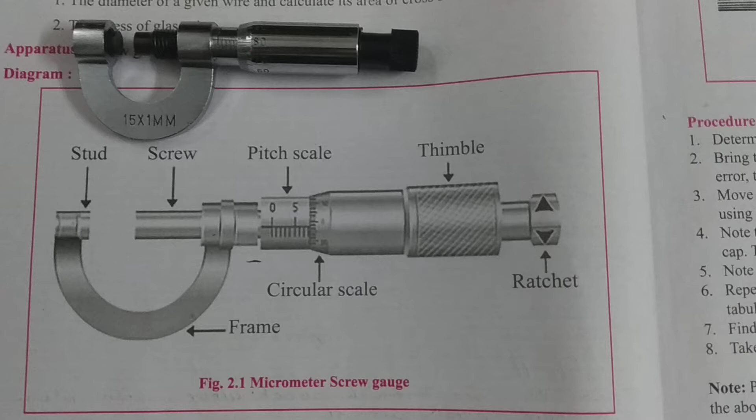Let us see the different parts of the screw gauge. So that's the stud over here. This is the actual instrument, the stud, the screw. So that's the screw here. Then you have the pitch scale, which is nothing but the main scale.

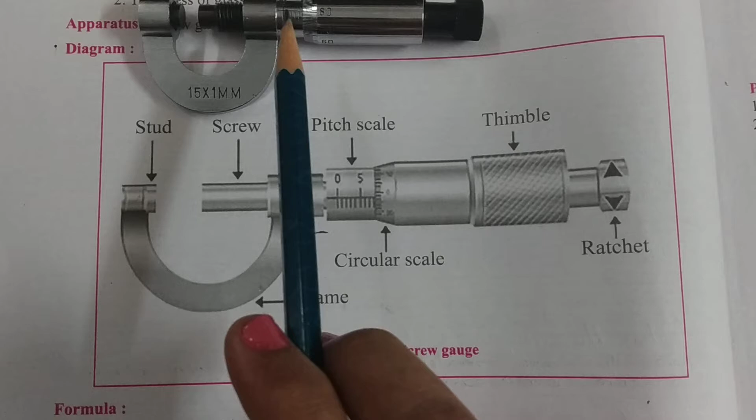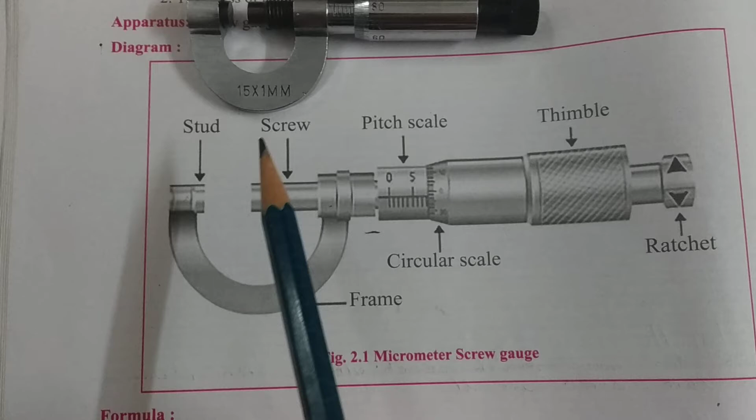Then you have the circular scale. So that's your circular scale here. You have the thimble, so the thimble is here. And the ratchet, the ratchet is over here. We have the frame, this is the frame. So that's your micrometer screw gauge.

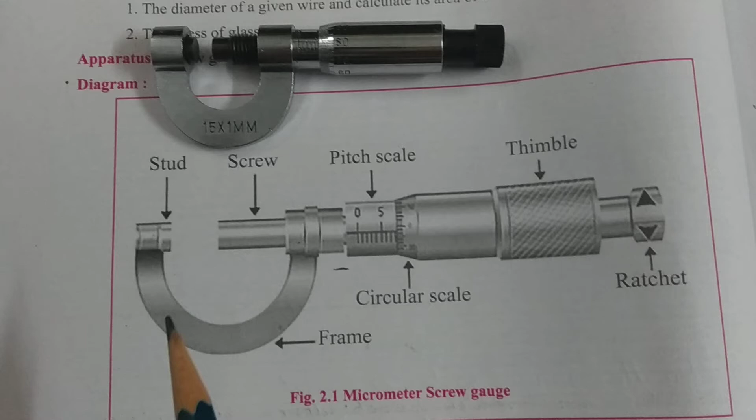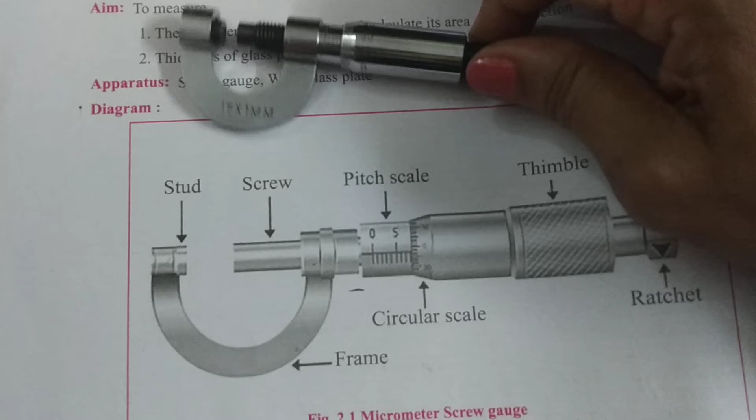Last time we saw how to find the least count. Today we are going to see how to find the zero error. To find the zero error, we have to first close the jaws. So close the jaws over here. After closing the jaws, you have to check whether the main scale 0 and the circular scale 0 is matching or not. Let us see the three cases.

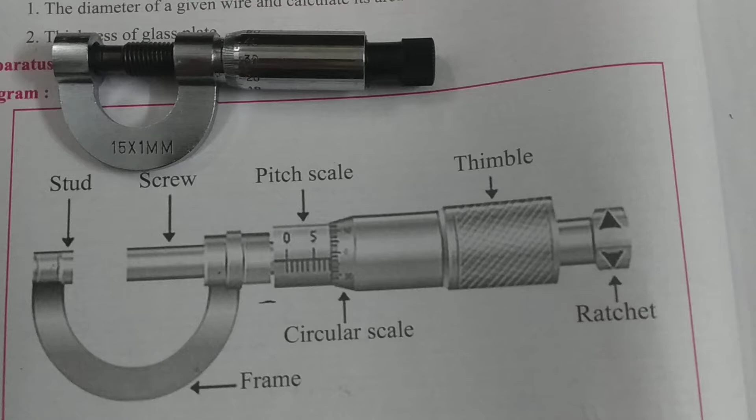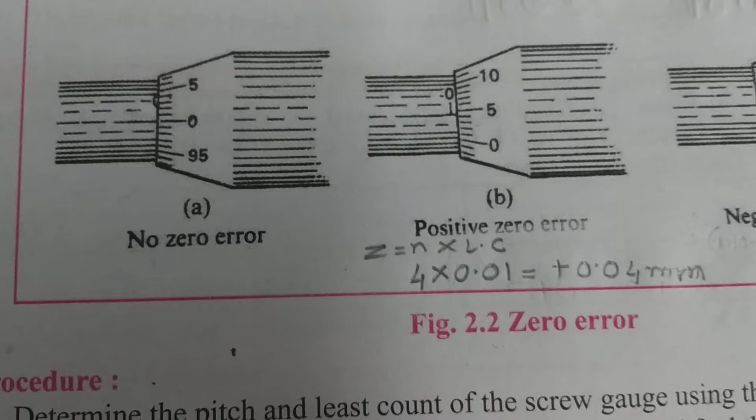In the third case, look at the 0 of the circular scale. It is little above the reference line over here. So since it is above, it is a negative zero error. Now how much negative? The zero error will be, look at the coinciding one with the reference line. It is 98. So if it is negative, you have to subtract it from 100. So 100 minus n, that is 100 minus 98, into the least count, that is into 0.01 millimeter, that is minus 2 into 0.01, that is equal to minus 0.02 millimeter.

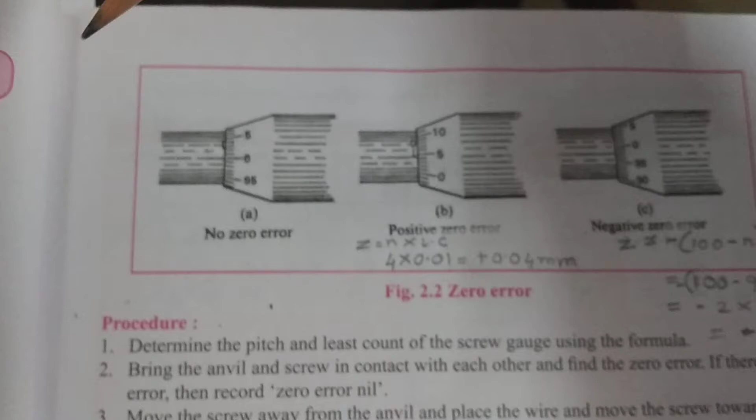Now let us find the zero error of our instrument. It can be any one of these three, it cannot be all three, any one. Now let's find it out. So that's our instrument. We will close the jaws first to find the zero error. So I've closed it, you can hear the sound.

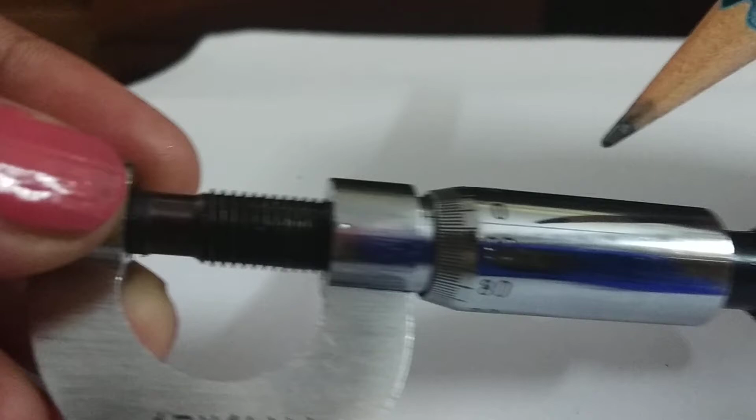Now look at the reference line where it is touching on your circular scale. Let us look carefully. That's the reference line here. See where it is touching? So it is touching somewhere around. So the 0 of the circular scale is here, the reference line is here. So obviously it is a negative zero error.

But how much negative? Let us see that. Look carefully. See, the reference line is here. It is coinciding with the 99th division. So this is 90, this is 0. It is just one down, so that is 99. N is 99.

So how are you going to write it out? It is a negative error because the 0 is little below the reference line. So let's write it down. We have 100 minus 99 into 0.01. Of course the error is negative, so you'll write minus. So that comes out to be minus 1 into, so 100 minus 99 is 1, into 0.01, that's the least count. So Z is minus 0.01 millimeter, which is equal to minus 0.001 centimeter.